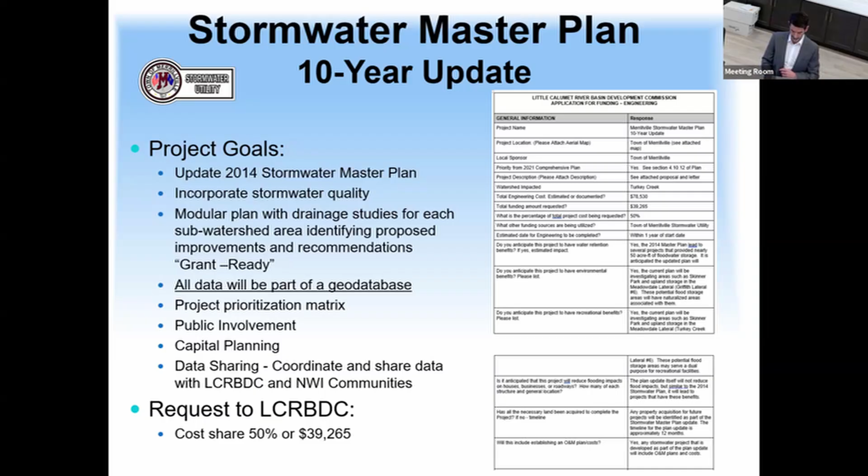Just real briefly, the previous master plan came out of a lot of what we all remember from 2008. And this is the cover page of that. Really what I'd like to talk just real briefly about is this concept of looking at each sub-watershed individually.

Which is what we would be updating. Really it's the detailed engineering analysis that is going to be critical with new rainfall, with new information, primarily new development that has occurred in the town, as well as a lot of flood control projects that had previously been constructed.

We want to incorporate that into the master plan and really see what's left to tackle. This is the western side of Merrillville, and we can see here the 9 different sub-watersheds that were analyzed in detail, from Meadowdale Lateral all the way down to the northeast portion of Turkey Creek. These would be the ones that we would be analyzing again.

We would be using similar models that we had before, again, looking at detailed hydrologic and hydraulic models, very similar to what you've been doing for your studies for the commission here. Looking at land use within each sub-watershed, looking at things such as the revenue contribution from their stormwater utility, the wards.

There's a stormwater quality component that we looked at in a lot of detail, looking at the hotspots from EPA and other websites and incorporating that. Using the models to delineate where flooding would occur, and then using those same models to come up with cost-effective flood control projects. We really make an effort to break down the benefits for each one of these projects, whether it's roadway overtopping that is reduced, residential, commercial structures that are protected, and then what's the cost of those flood control projects.

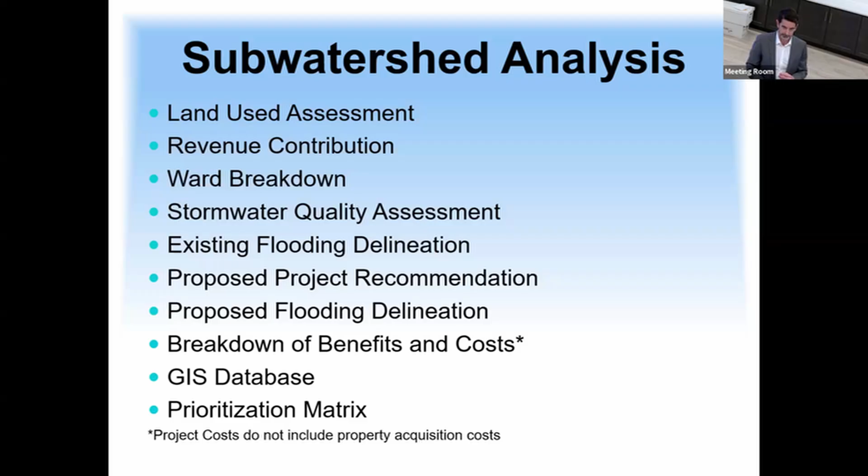This is an example of nice graphics of the GIS database that we have. In this database, there's water quality data, land use data, parcel topography, FEMA data. Again, all that is going to be updated now because in the last 10 or 15 years, the amount of data that's available has grown significantly.

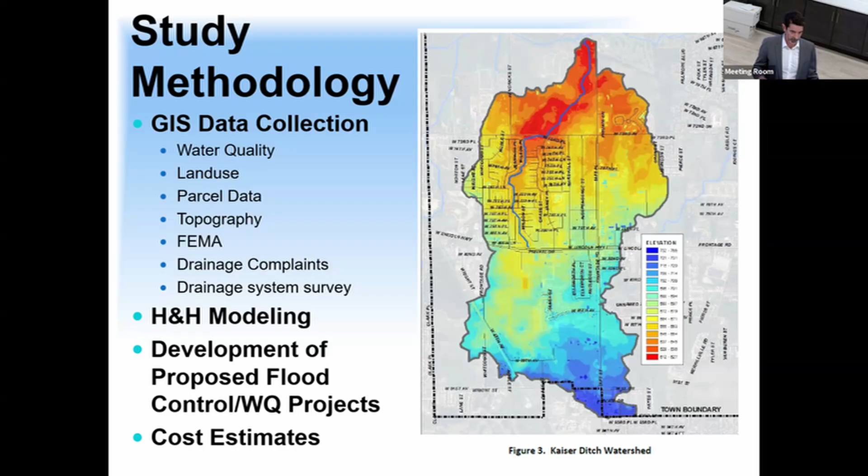The methods that we're using to analyze that data with the hydrologic and hydraulic models have come light years in the past decade. So we're going to be updating these hydrologic and hydraulic models and this GIS database with this new information and new methodology, again coming back to developing new projects and coming up with cost estimates for those projects.

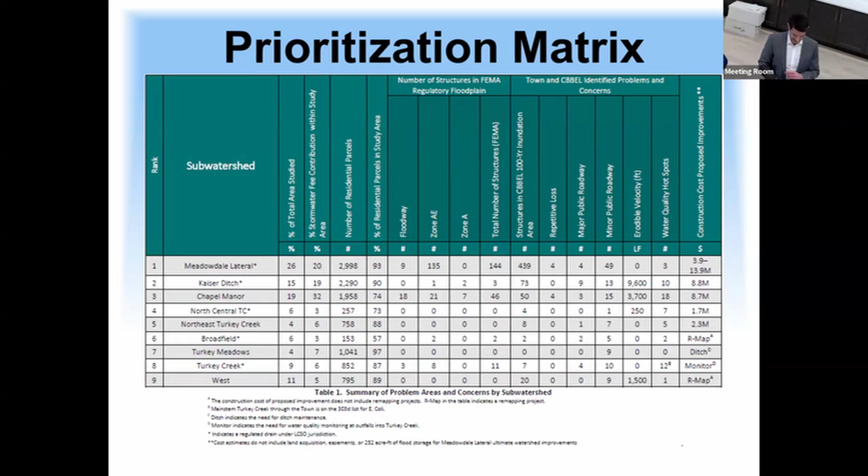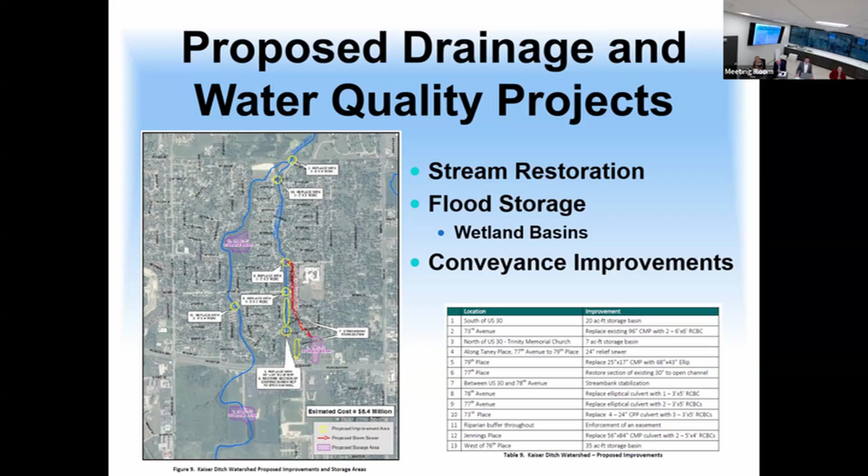That's really the goal of the previous watershed plan. I'll talk briefly about a couple of projects, but the previous watershed plan was really a launching pad for the town to implement several projects that have been very beneficial. That's really the goal of this plan: to come out of it with projects for stream restoration, flood storage, conveyance improvements, all things improving the quality of life in the town.

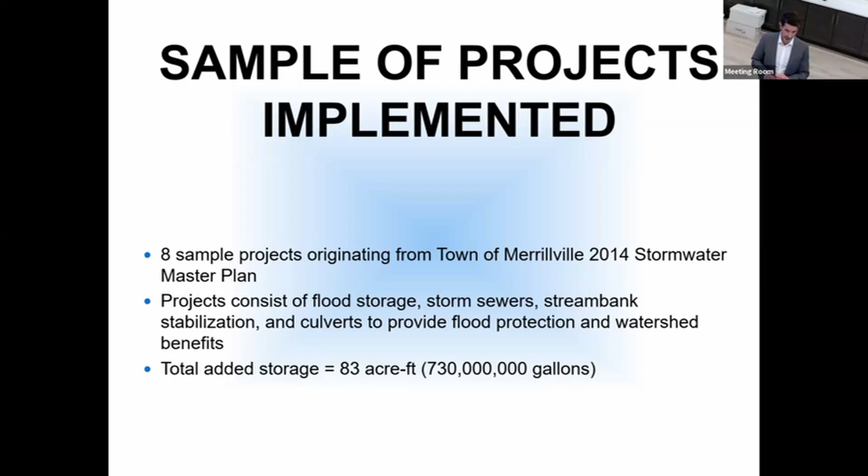I'll scroll through a couple slides here. These are 8 sample projects that have originated from the previous plan. It's important to know these consist of flood storage, which is usually the primary component, storm sewers, stream bank stabilization, and culverts providing flood protection and watershed benefit. The total storage added in the town since that study is 83 acre feet, or 730 million gallons of floodwater storage, added since 2014 based on the results of that 2014 master plan, which is why we feel it's so important to update it so we can find more beneficial projects that can provide this type of storage in the watershed.

One of the first ones we did was the Taft Street Drainage Improvement Project. That was $2 million, roughly 20 acre feet of storage, by coordination with INDOT.

Another one was the Bon Air Lake Culvert Replacement Project. That one was a smaller cost, lowering a culvert but creating a big bang for the buck there in storage, almost 9 acre feet of storage for that.

Another project I was involved with is the Meadowdale Lateral Flood Storage Project. As part of this, in coordination with the commission here, we analyzed the full upstream watershed and provided some additional work that could be done. A tremendous amount of flood storage, 45 acre feet, was all provided in wetland habitat out here. Again, something identified in the 2014 Stormwater Master Plan.

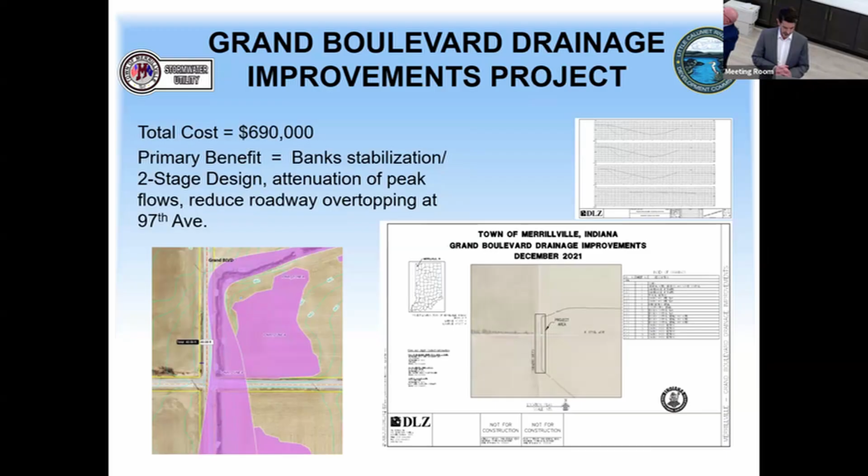Grand Boulevard Drainage Improvement Project. This was more of a stream bank stabilization project that came out of the Stormwater Master Plan.

In Connecticut and 69th, this was to help protect a school in a neighborhood and to eliminate a lift station. It involved primarily storm sewers.

Kaiser Ditch East Tributary Flood Control Project, again, came directly out of the Stormwater Master Plan, and primarily included reconstruction of culverts that we see here in that nice pretty picture.

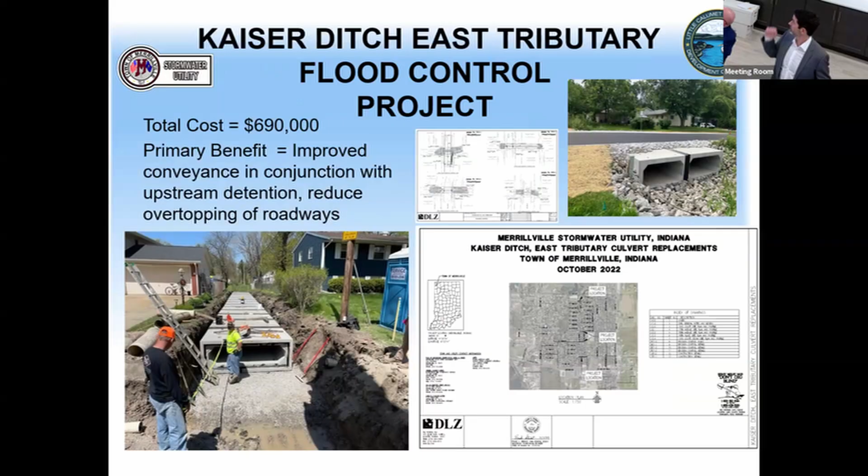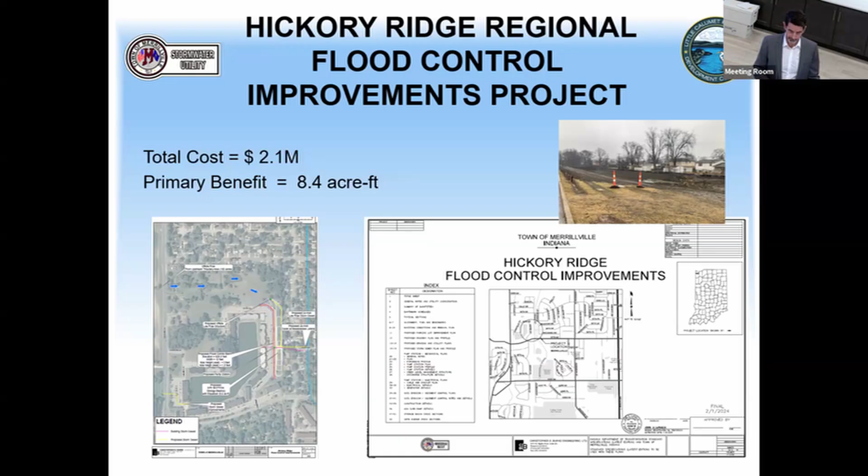The Hickory Ridge project has completed design, has been bid out and is starting construction. Hickory Ridge subdivision was hit really hard during the 2008 flood event. The main level was completely inundated with flooding, so this project provides additional flood storage as well as pump station and drainage improvements to protect the condo complex.

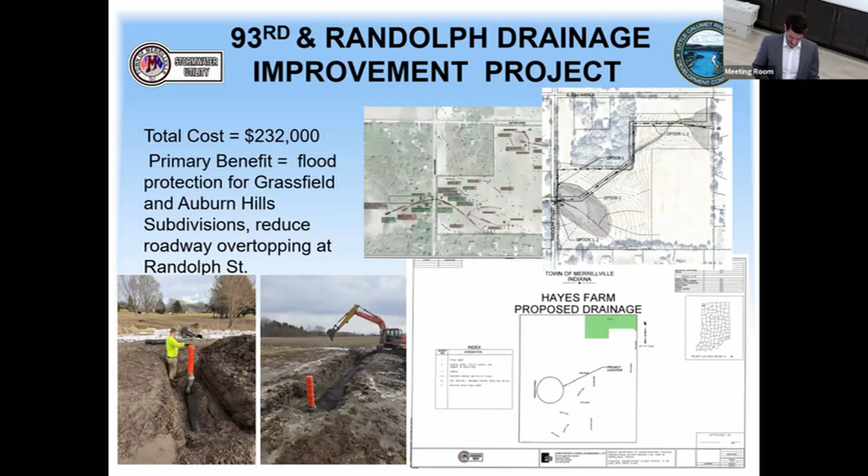And finally, one here on the far east side of town, which involved primarily storm sewers and drain tile work.

So with that, I know Matt, if he were here, would give a special thanks to the commission for all your support in the past. And I look forward to teaming with you in the future for great drainage. So thank you.

With that, I'll answer any questions. Sure, thank you, Darren, appreciate it. Anybody got questions? Thank you for allowing me to speak. Let's start down here on the left. Had one question, go ahead, Robert.

For the roughly $39,000 engineering study, what's the duration of that? How long would it be, when would we see the deliverable? One year, you said? It would be approximately one year.

Thomas? You good? Did I see 50 acre feet of storage? Where did I see that? That's on the first or second slide somewhere, maybe.

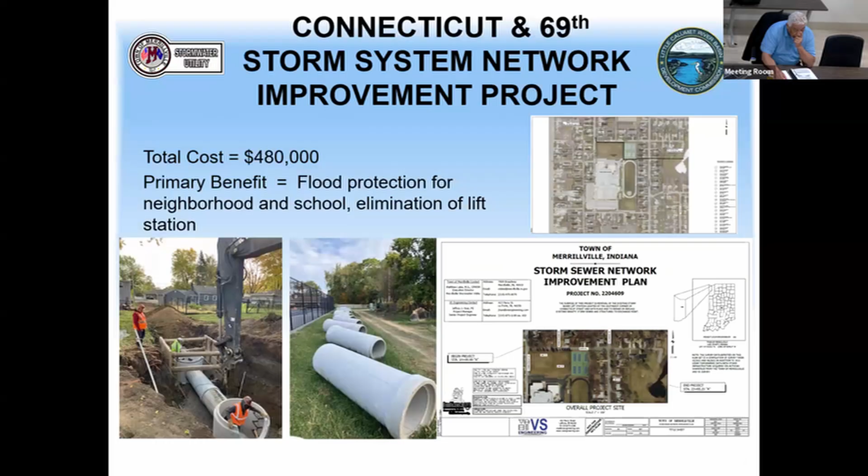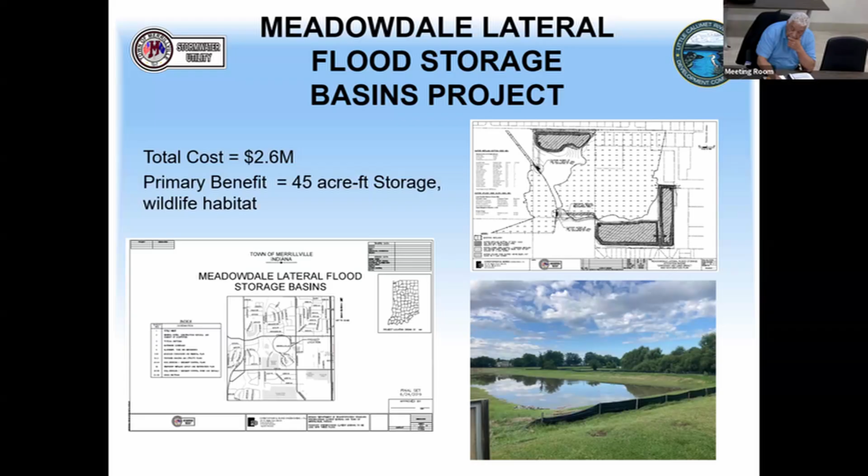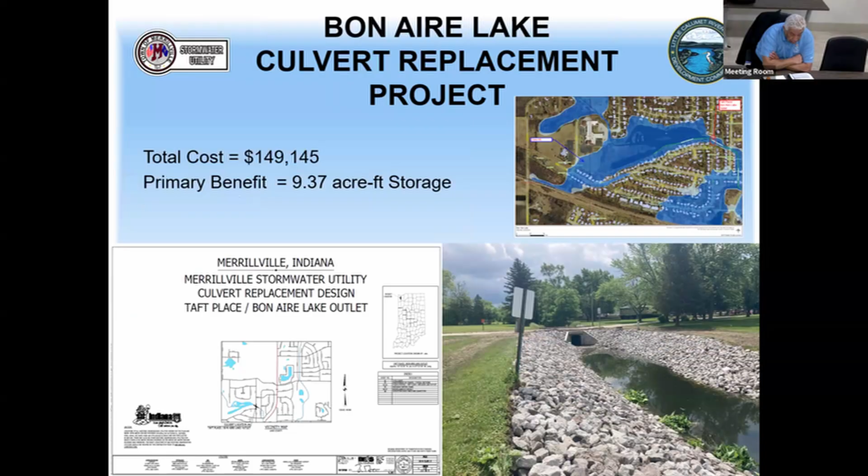This is sort of an arbitrary question: do you have any type of, maybe this is a Matt Lake question, sense of what the potential acre feet storage opportunity might exist further up north than that? Yes.

So we did study that, and there were areas, some vacant land, I believe at one point owned by maybe the school district further north of the town's limits. We had looked at a couple different alternatives for providing quite a bit of flood storage, many times this amount of flood storage up there. And I believe that is one of the things Matt would like to do as part of this update.

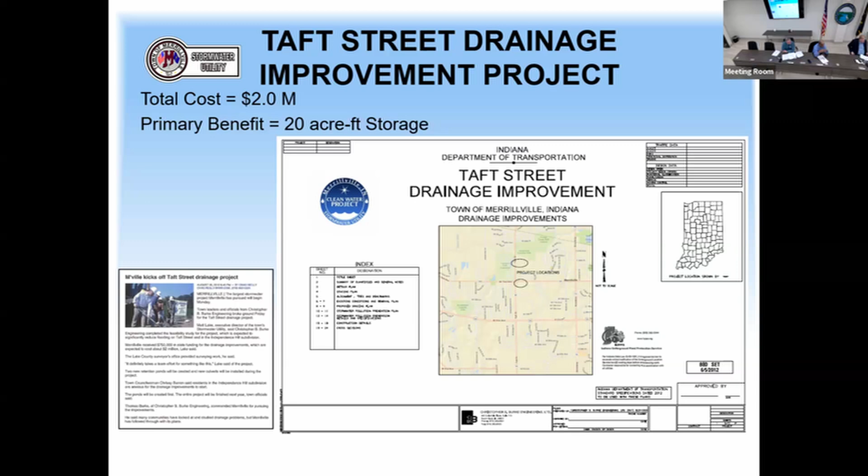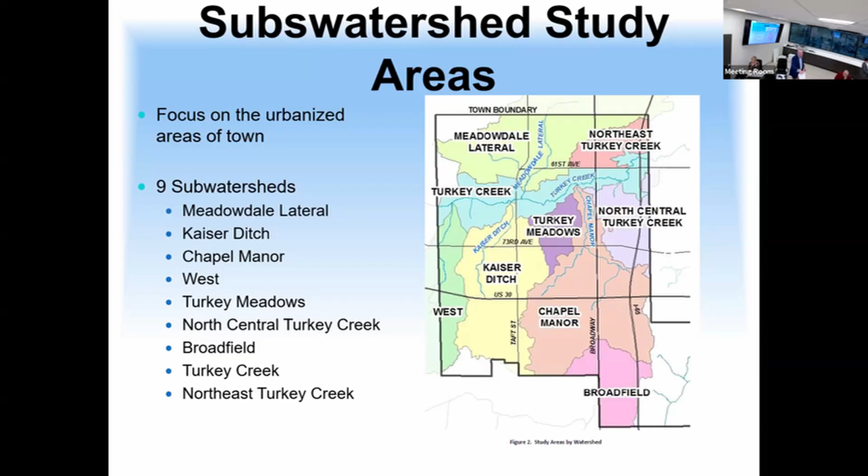Okay, great, thanks dear. Ron? Oh good, excellent, thank you Darren. Thank you for having me. All right, Mr. Repay? Batter up. Yeah, the next three presentations, same person, so not a lot of changing in people here.

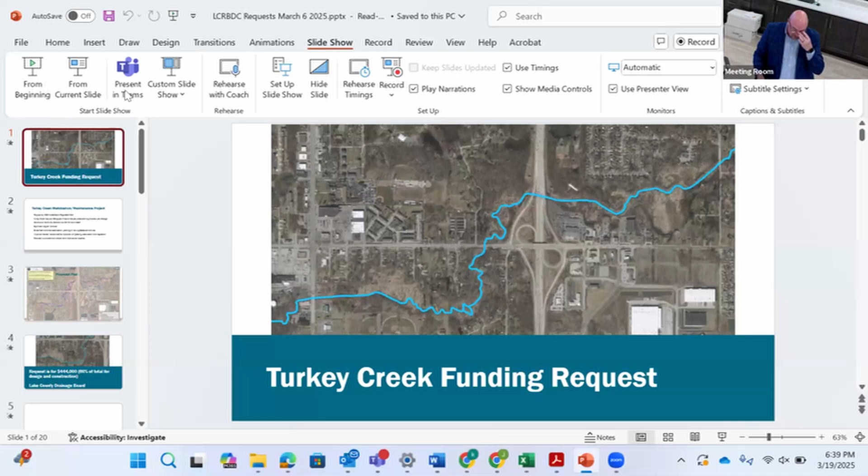So the first one's gonna be Turkey Creek maintenance. This is gonna be a three-phase project starting on the far east side, basically looking at opportunities to stabilize it and opportunities possibly for storage.

So I don't want to take all of it. You're gonna go right into your Town of Dyer one, right? Yeah, I got it, he's gonna go with it. I'm not a good open lead anyways. So you're gonna do the next three. Yeah, correct, yes. Name and...

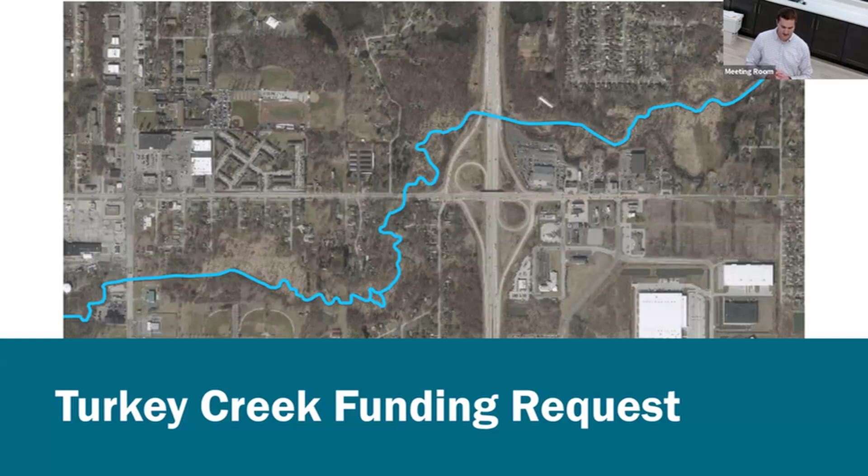Good evening everyone, my name is Joe Wilk, I work at Christopher Burke Engineering. As Dan said, I'll be presenting on 3 projects back to back to back here this evening. So first and foremost, thank you for having me. The first presentation I have is a Turkey Creek funding request.

This is a request by the Lake County Surveyor's Office to address a regulated drain, Turkey Creek. Turkey Creek has over 38 square miles at this portion of regulated drain that we're looking to do some work on here this year. It's just upstream of Lake George. My next slide will have an aerial view of the work area. Benefits include communities of Merrillville, Schererville, Griffith, and Hobart.

In this corridor of Turkey Creek, there is some significant log jams that are built up. There's some areas that need stream bank and toe stabilization. Looking at plants, some native grasses and shrubs, some trees, as well as the hard armor at a few of these bends, which are leading to potential infrastructure risks. Other things we're looking to do, as I mentioned, are stone banks, habitats, and a lot of this work is looking to reduce the sediment and erosion being conveyed downstream into Lake George.

So here's that aerial view I was talking about, it's kind of color coded, but a few spots - I actually walked this stretch in November this past year. It is from Liverpool Road to Broadway, or State Road 53, I believe, and it's about a 2-mile stretch this phase. We're calling it phase 1. It calls for a slew of tree removals, as these trees are right up on the edge of bank at the toe and about to slough in any year now, potentially any month.

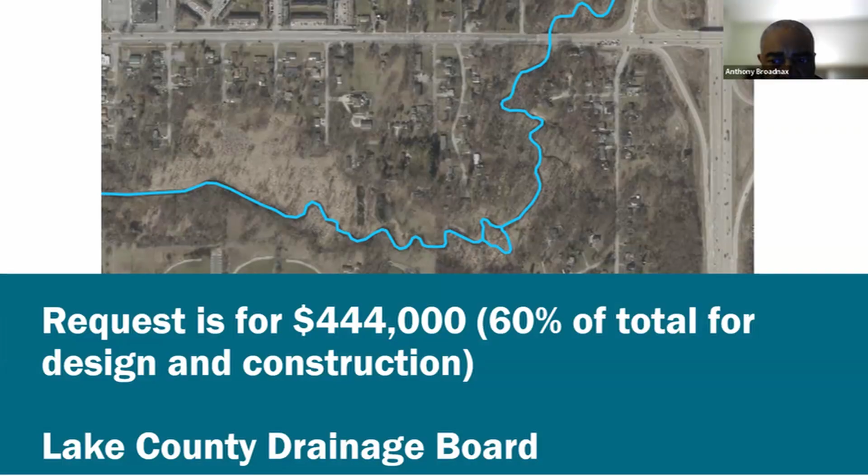This extends, we walked about 9 or 10 miles in November and December, from Liverpool, the downstream end of the county drain, the regulated drain of Turkey Creek, all the way up to about US Route 30, so roughly 10 miles. Is the requester the surveyor's office? Yes, Lake County Surveyors.

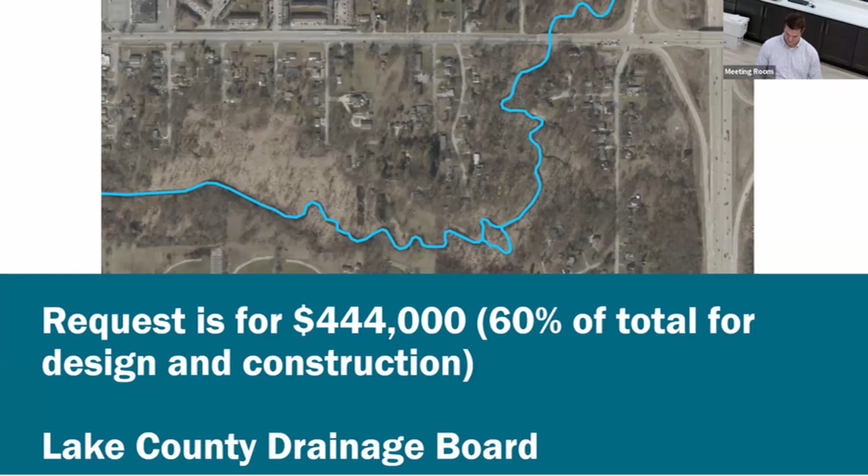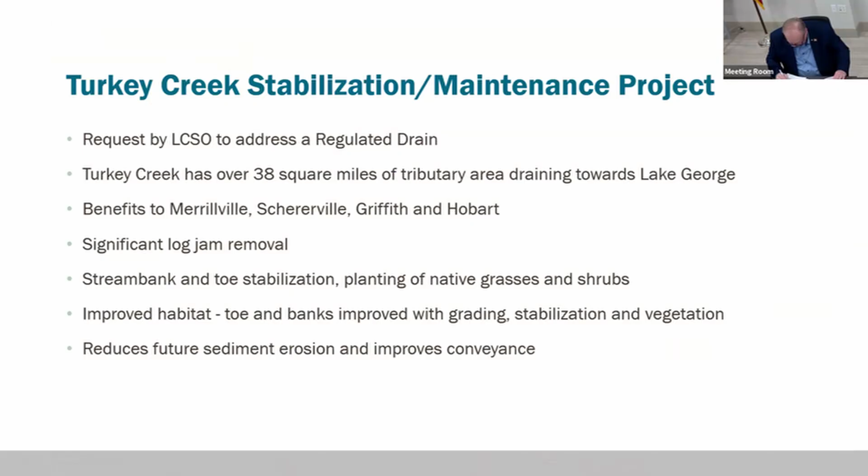Mr. Chairman, I have a question regarding the design. You're not sponsoring, right? Hold on a second, Anthony. Hey Joe, quick question - you said there's a bunch of felled and down trees in there, but I think the plan indicated you're going to plant trees.

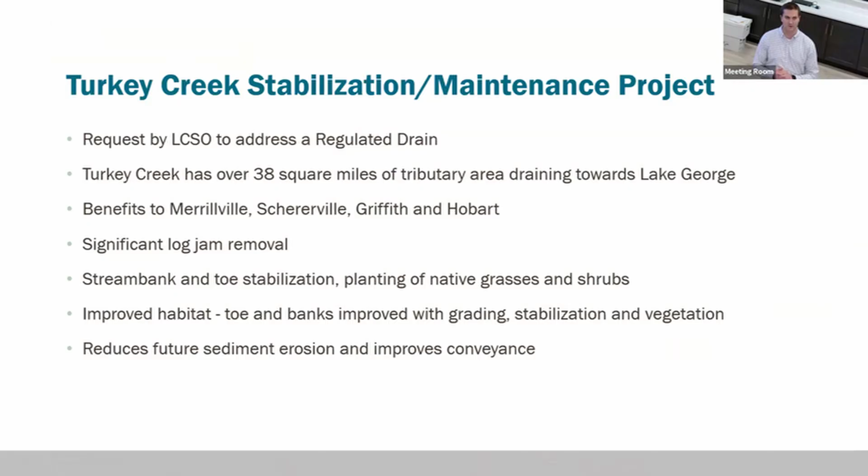Yes, so a lot of trees - the county last did a full-scale maintenance project on this drain about 15 or 20 years ago. If you look at aerials, a lot of this floodplain area is filled with trees. Beavers have gotten to it and a lot of trees are down, which means there's no canopy cover on this area of Turkey Creek, and it's decreasing water quality. We're looking to provide more shade by planting trees and getting that canopy cover back as part of this project.

Okay, so we'll have the same problem again in 20 years. Well, I think what comes to me is that negligence of it not being maintained right now is a major issue.

So that's beavers, that's different, that's the county. The county has done various projects throughout the Turkey Creek corridor at locations facing severe erosion. There's been some projects completed - right off 61st Place, a gentleman's house was facing erosion, and the county did a project not a handful of years ago to address the 10-foot, 12-foot cliff there.

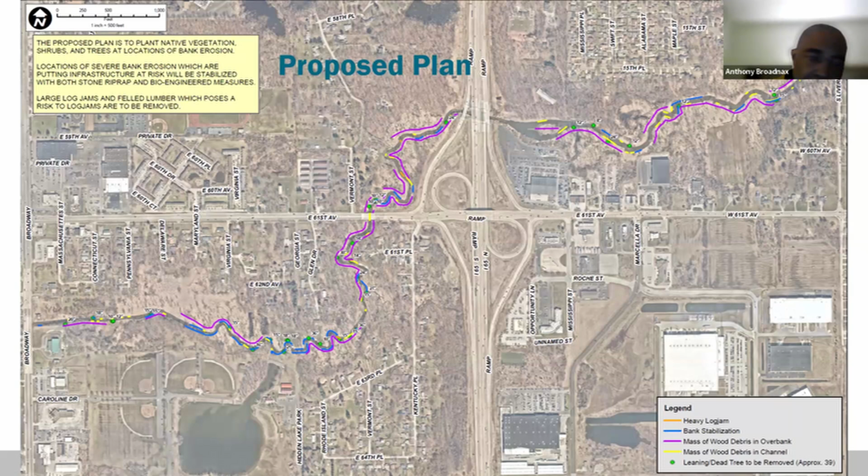I have a question, Mr. Chair. You've got a total of $740,000 in your estimated construction, planning and design cost. Correct. And I heard mention there are 3 phases to this - this application has phase 1 listed. Is that cost for all 3 phases or just phase 1 of 3? We're looking at just phase 1 of 3, that cost.

Does the planning and design, the $40,000 attributed to it, cover the whole system or just this one phase? Right now we're looking at phase 1, but likely it won't come to that much. There'll be additional planning and design costs for the next 2 phases. Correct. Thank you - so the $40K is just for this segment. Correct.

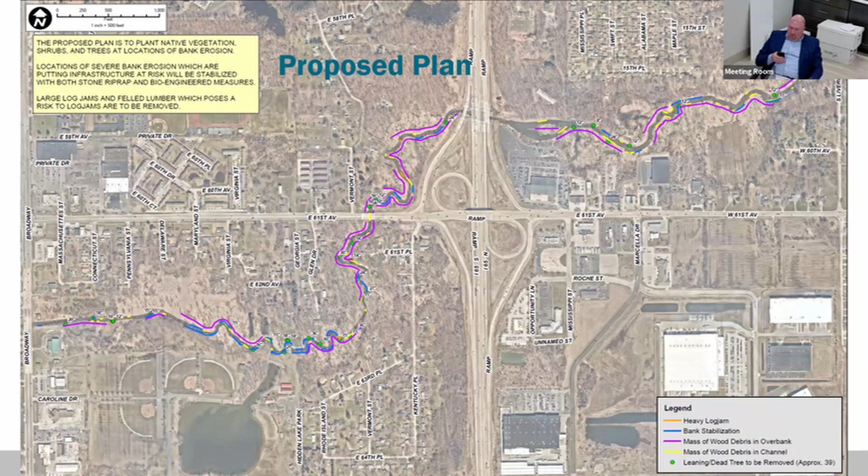You good, Ron? Yes sir. Thank you, everybody, anybody else? So what is the total lineal footage of ditch you're addressing here on Turkey Creek - how much work will be done for $700,000? Well, we've walked this whole stretch that you see on the sheet, along with some other parts for phases 2 and 3.

And is everything represented here phase 1? Yes, and as we get further along with planning and design we'll have more detailed sheets, but we're looking at everything in color here as work to be done, areas of work. So that's all phase 1 work. Correct.

Thank you - that's 10 miles? This sheet right now is about 2 to 3 miles. And the toughest part about this area is the wetlands and access, so we're trying to disturb as little as possible - timber matting to get construction vehicles in tends to be a large construction cost. Is all 3 phases 10 miles total? I thought I heard you say 10 miles. Correct, roughly. Okay.

Anybody else? Nothing for me on that one?

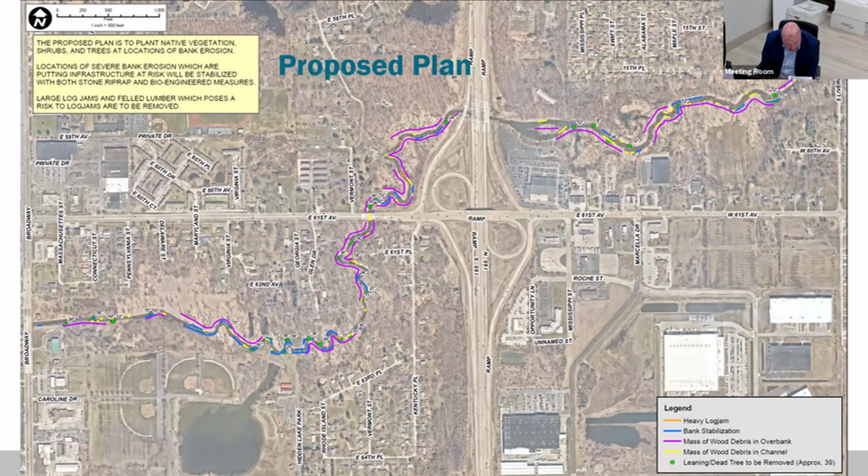Okay, let's go to the next one, Sandy Ridge. Right, you guys get more of me. It's better than me, though. You get three chances at that.

This subdivision has about 96 acres of tributary drainage area. What we're looking to do is there's a park on the north side of the subdivision that is a low spot in the area, which if you look back at old aerials before the town was developed, was a low-lying marsh, and now it's collecting a lot of stormwater. There's a conveyance issue downstream, there's a detention basin downstream, and this park is upstream. We're now looking to provide more storage volume in this park area.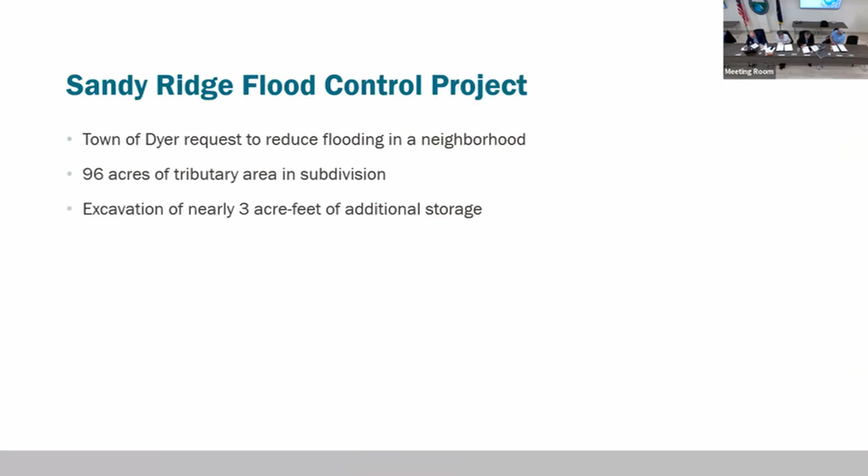This area drains to Dyer Ditch — sorry, I should have mentioned it earlier. You might be able to see it here... no, I don't think so here. You can see my cursor — Dyer Ditch runs just alongside Castlewood Park.

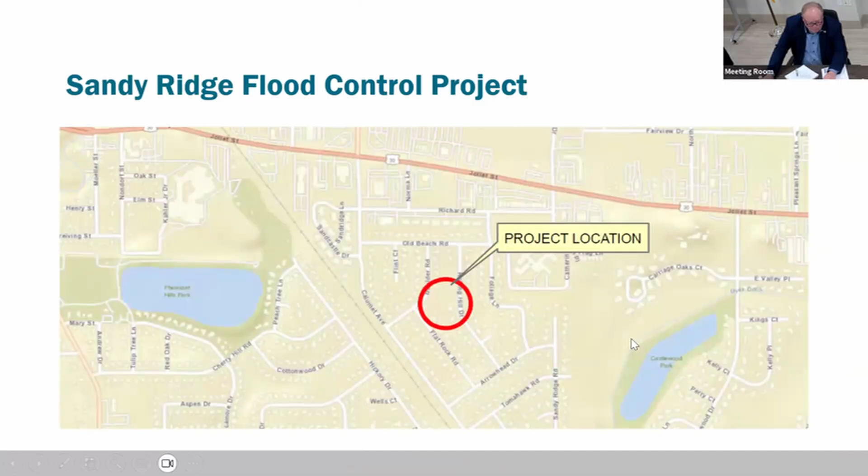And you said there's currently a storm sewer there that takes some of this water out? This project location drains to a storm sewer under Flat Rock Road, which then goes to a detention basin on site, which is pumped up as well into Dyer Ditch. That detention basin is at capacity under your design storm, which is why we're looking to add more storage upstream.

Question, Mr. Chairman. Go ahead, Mr. Broadnax. Thank you. Looking at the contours and the road, it looks like we're going to hold about 4 feet of water in this park, if I'm correct. How long is that water going to sit in there before it pumps out? And are there any environmental considerations, like mosquitoes or anything like that? Great question. We designed this park to drain out in a 24 to 36 hour storm period.

Gravity? Oh, no, you said a pump station. So it actually is gravity drained for about the top 70%, I would say, and then the bottom, the lower 2 to 3 feet, would be pumped out via that small pump station at the southern corner. Roger, thank you.

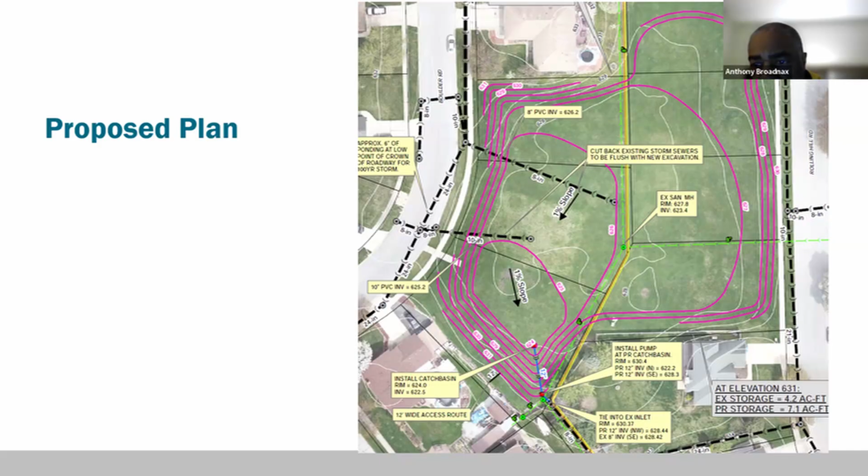I have a question, Mr. Chair. Mr. Ware. Is this in a current homeowner association or no? It is not.

Anybody else? I may have missed it — how many acre feet of storage did you say? We'll be increasing it by 2.9 acre feet.

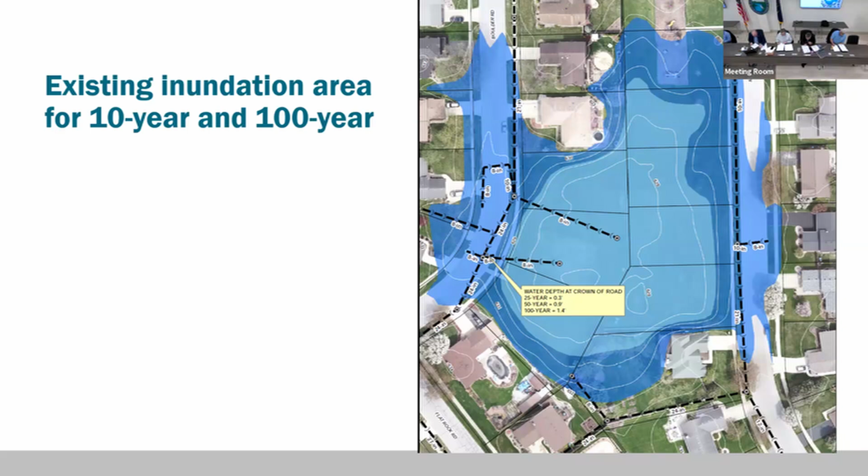Do you guys think that if you did this, all that road water would be gone? Most of it — 6 inches in 100 years, shows 6 inches over on Hill Road there. Oh, see that picture.

Anybody else? All right, I have a question. Oh, go ahead, Mr. Ware. Does the town currently have the money appropriated for the project? I do not know that answer off the top of my head, but I can find that out.

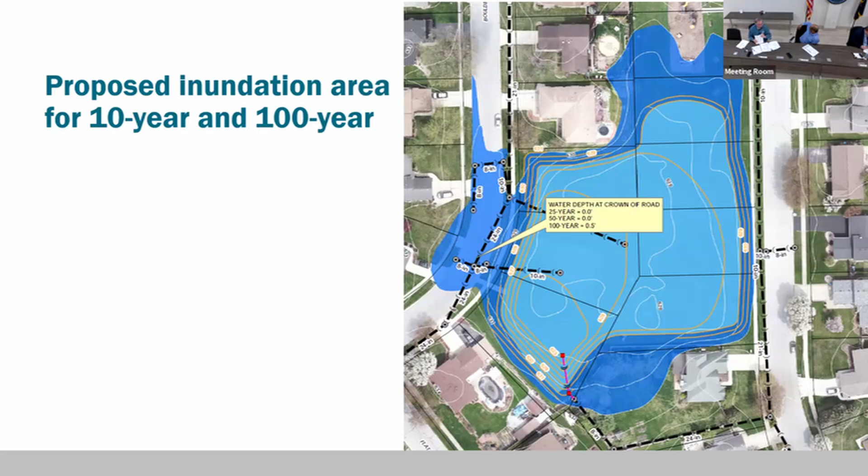All right, next one, Schererville Ditch, presentation 3. This is the Schererville Ditch funding request. The local sponsor is the Lake County Surveyor's Office.

This request is related to stream bank stabilization for about a quarter-mile stretch on Schererville Ditch, from Indianapolis Boulevard down to Deer Creek Road, near the Stonebridge subdivision on Janice Drive. It's US 41.

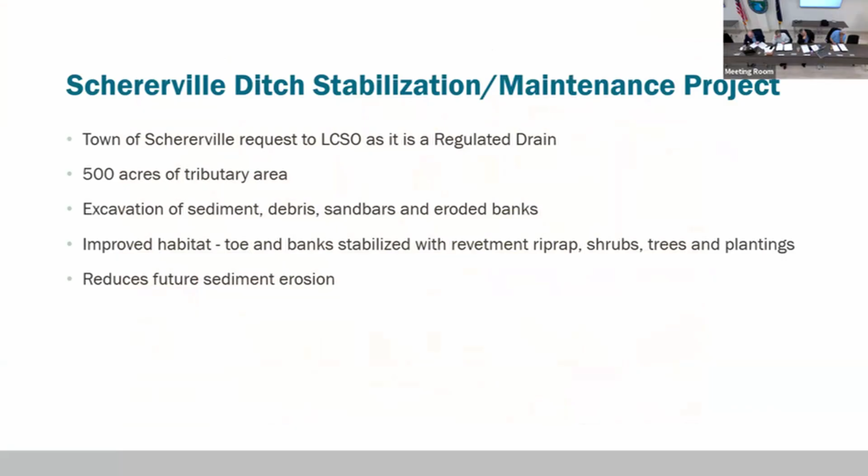This is a county regulated drain with about 500 acres of tributary area. It's facing some severe erosion. A lot of sediment has sloughed off the stream banks and is starting to be conveyed downstream into Schererville Ditch, which conveys into Dyer Ditch, which then conveys into Hart Ditch.

We're looking to stabilize these banks, improve habitats with stone riprap armor at the bottom, and plant trees, shrubs, and other vegetation along the middle upper half of the bank as well as at the top, all to reduce future sediment and erosion.

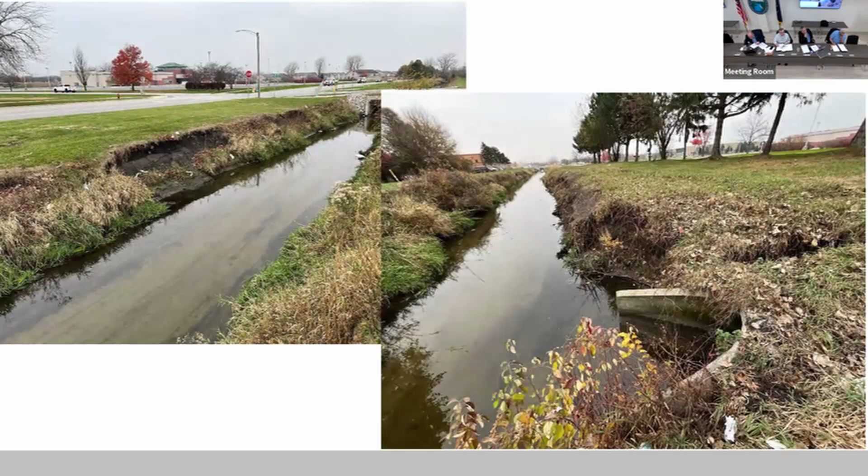Here's a couple photos from the bank. Each side of the stream bank has probably eroded about 3 to 4 feet in the past couple of years from major urban runoff events, similar to what you saw tonight, where this thing rises up several feet in a matter of hours.

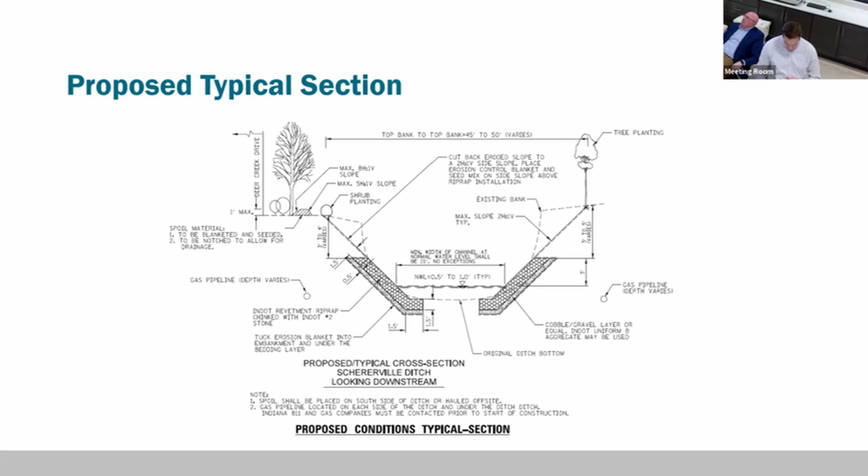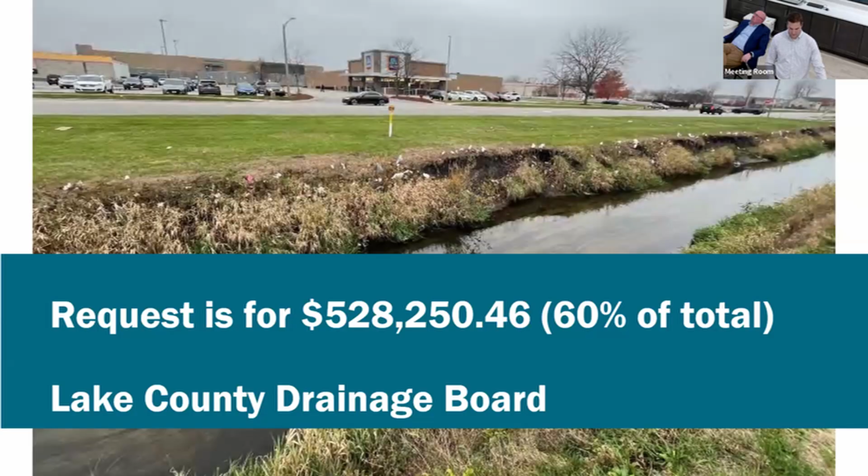The request from the county surveyor's office and county drainage board is $528,250.46, which is 60% of the total estimated construction cost. With that, I'll take questions on presentation number 3.

This is in the town of Schererville. Are they going to participate in any of this? I don't have that answer, but I believe so, and I can find that information out. Is this a result of development north of it? That development's been there about 25 years, but this erosion, if you look at aerials, is from about the past 4 to 5 years.

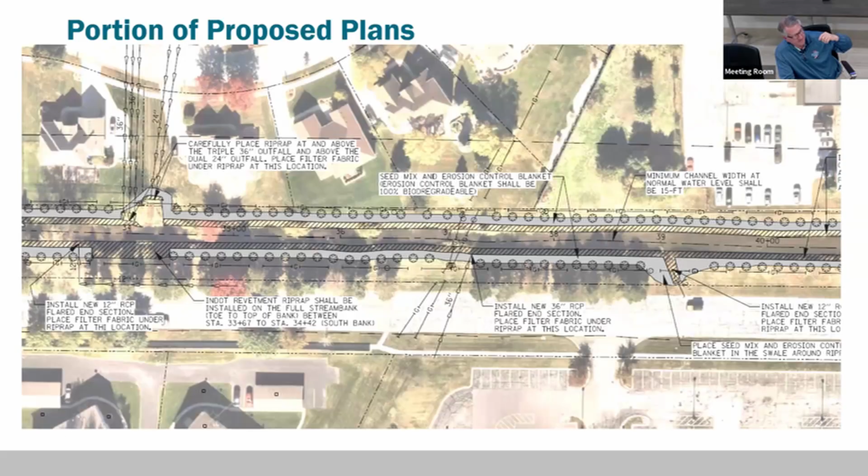On the map, the shaded red area goes across 41 and to the east—is there any work associated with 41 itself, culverts, or on the east side of 41? There's a little portion on the east side, just in the past less than 12 months, that had severe erosion where existing riprap was, and then a couple feet downstream it started scouring out. So there's about a 50-foot stretch there we'll do a little work on.

No disruption to traffic or 41 itself? That work would be about 100 feet east of 41, and all the work would be done from the parking lot there. I also inspected the culverts under 41—I've been out here a few times and they're in good condition.

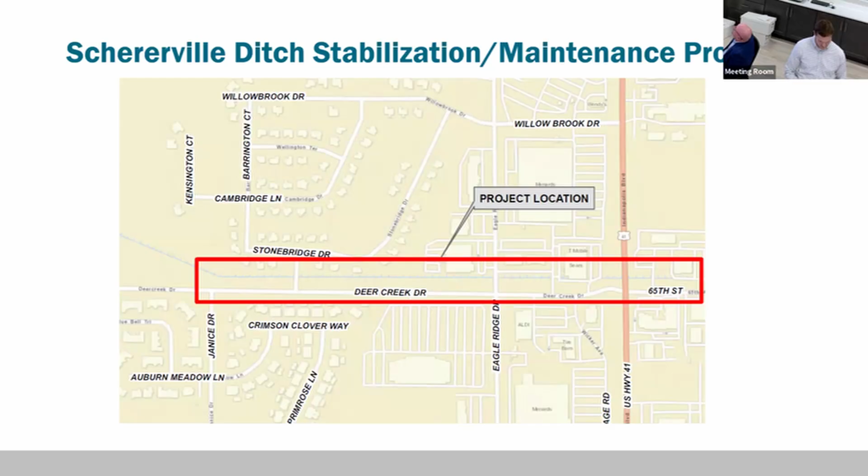What's the length of this project again? Is it about a quarter mile? Quarter mile, okay. Actually, I believe it's closer to a half mile, thinking about how long it takes to walk a mile or half a mile.